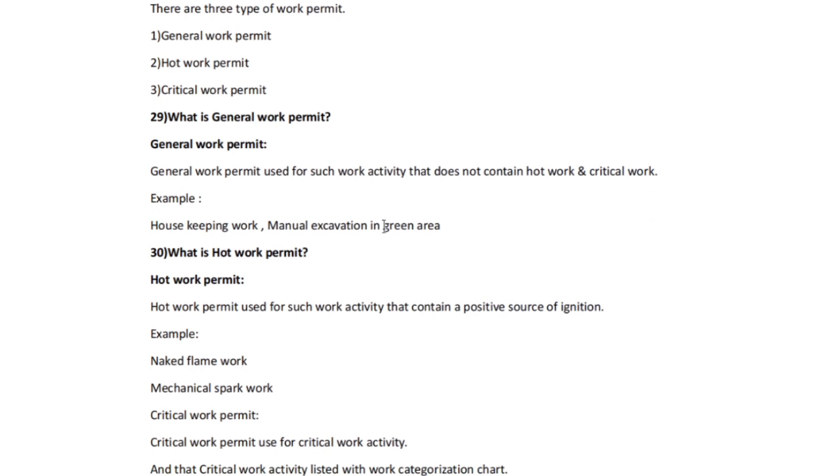Let us discuss the general work permit. A general work permit is used for work activities that do not contain hot work and critical work. Example: housekeeping work, manual excavation in green area.

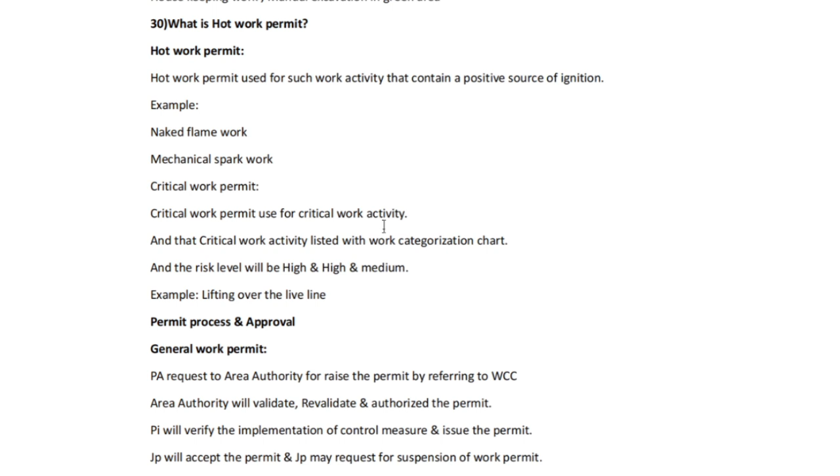What is a hot work permit? A hot work permit is used for work activities that contain a positive source of ignition. Example: naked flame work, mechanical spark work. That means a hot work permit is used for work activities that contain a positive source of ignition. Naked flame work and mechanical spark work are both great examples of hot work.

Let us discuss the critical work permit. A critical work permit is used for critical work activities, and those critical work activities are listed in the work categorization chart, and the risk level will be high and medium. Example: lifting over the live line.

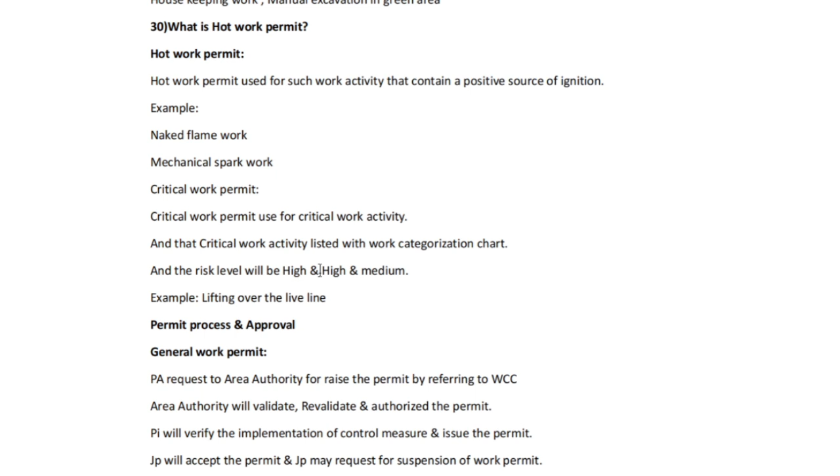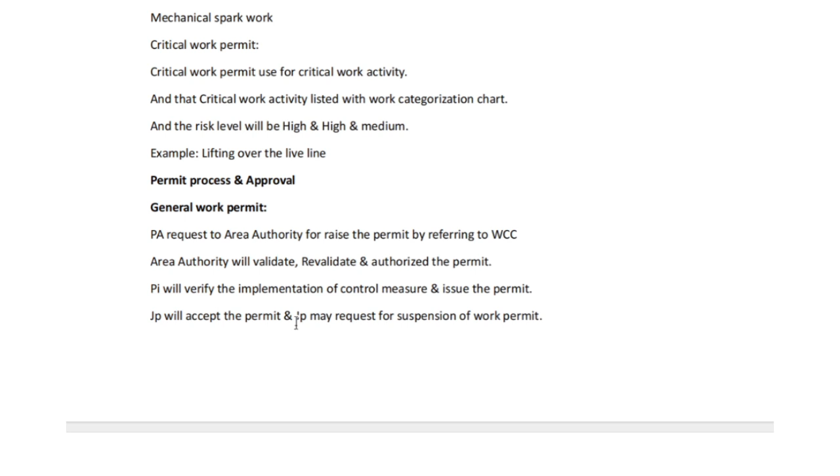Permit process and approval. General work permit process and approval. PA requests the area authority to raise the permit by referring to the work categorization chart. Area authority will validate, revalidate and authorize the permit, and PI will verify the implementation of control measures and issue the permit, and JP will accept the permit, and JP may request suspension of the work permit. That means PA, area authority, PI and JP. It's the permit process for the general work permit.

Hot work permit and critical work permit: PA, area authority, asset approval, PI and JP. PA requests the area authority by referencing the WCC. Area authority will validate and authorize the permit. Asset approval authority will approve the permit. PI will verify, implement and issue the permit. JP will accept the permit.

Next, in what condition can a permit be suspended? A permit can be suspended in case of bad weather conditions, in case of medical emergency, in case of change of hazards. JP can request suspension of the permit. Next, how many sections are in the permit and what are the sections? The permit has 7 sections: permit request, worksite control and supporting documents, permit endorsement, permit approval, permit authorization, worksite issue and suspension, and permit closure.

Next, after suspension of the permit, who will revalidate it? After suspension, the permit will be revalidated by the area authority and permit issuer. How to revalidate the permit? JP will request to PA and PA will forward to the area authority and PI will issue the permit. That means JP, PA, area authority and PI. How do you close the permit? JP will request to PA, PA will forward the request to PI and the area authority will close the permit.

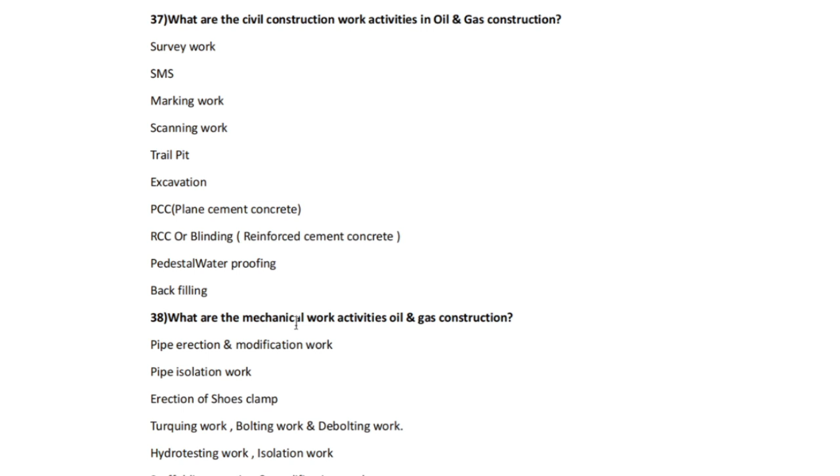How many activities are included in the critical work permit and hot work permit? 17 activities are involved in the critical work permit and 8 activities in the hot work permit. What are the civil construction work activities in oil and gas? Survey work, marking work, scanning work, trial pit excavation, PCC, plain cement concrete, RCC, reinforced cement concrete, pedestal, waterproofing work, backfilling. All these are great examples.

What are the mechanical work activities in oil and gas construction? Pipe erection and modification work, pipe isolation work, erection of shoe clamps, torquing work, bolting work, debolting work, hydro testing work, isolation work, scaffolding erection and scaffolding modification work, lifting of pipe and spool work, lifting of steel bridge structure work, lifting of precast elements, coupling connection work, joint coating work, touch-up paint work, etc.

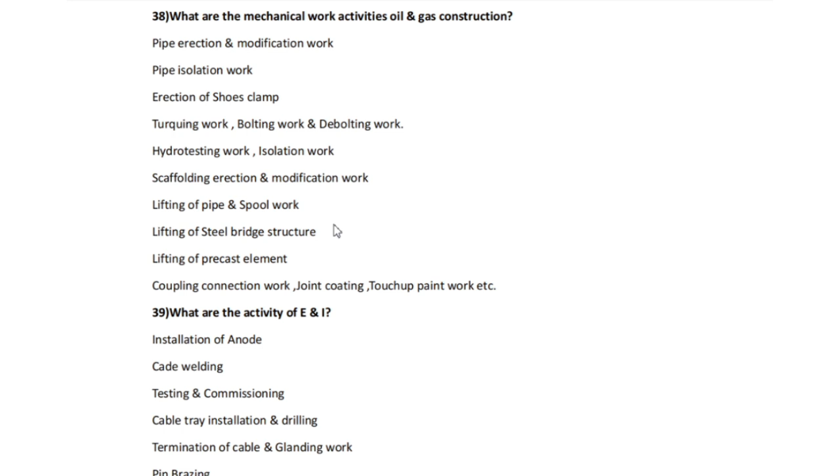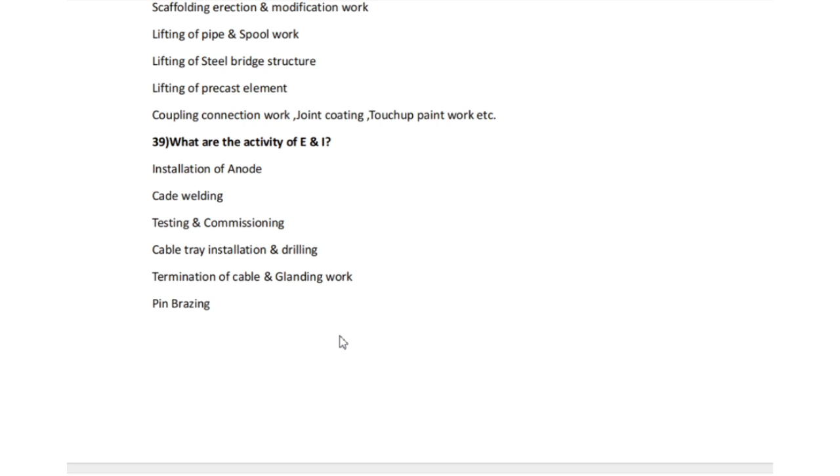What are the activities of E&I? Installation of anodes, CAD welding, testing and commissioning work, cable tray installation and drilling work, termination of cable and glanding work, pin brazing work.

What are the documents required for Zone 2 of EPC construction work? Required equipment third party certificate, required equipment Zone 2 third party certificate, required equipment spark arrestor third party certificate, required equipment engine over speed shutdown Chalwyn valve third party certificate, RFI. What is the work scope of MOT? Replacement of the existing underground GRE pipeline with an above ground carbon steel fire pipeline.

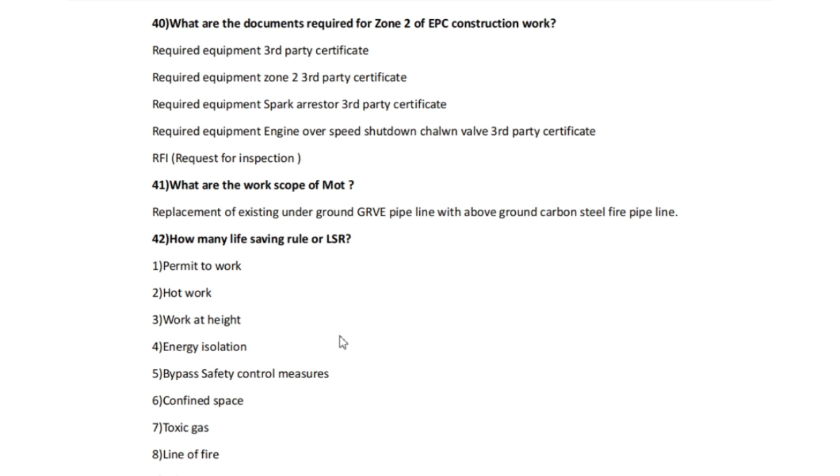How many life saving rules, or LSR? Permit to work, hot work, work at height, energy isolation, bypassing safety control measures, confined space, toxic gas, line of fire, safe driving, safe mechanical lifting. How many certificates are attached with the permit? ITDR, energy isolation, temporary defeat, digging certificate, radiography certificate, confined space entry certificate, excavation certificate, atmospheric test certificate, vehicle and machine entry certificate, easement certificate and road closure certificate.